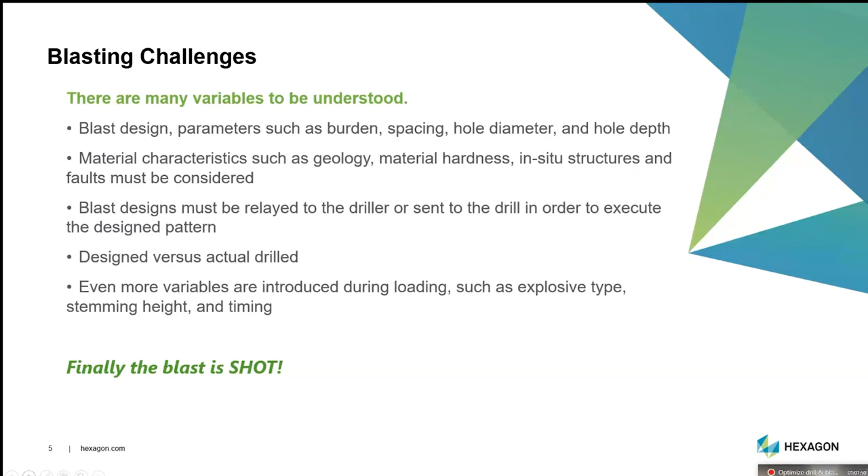Some of the challenges get introduced when you start looking at the explosives and stemming and all these things that are pertinent to a proper blast. So all these challenges, we are aware of them, and you need to have a very good understanding of this. So once you have done your blast, there is a need for you to quantify the blast or to clarify how the blast has gone, and to give an account of whether it is a good blast or a bad blast.

And in most cases, I think it's quite industry standard that we use some key performance indicators. It might be fragmentation, it might be vibration, it might be ore loss and dilution to quantify the performance of our blast. And I think what is critical is that delicate balance between some of these key indicators. It might be fragmentation and ore loss or dilution, which are the subject of our discussion today.

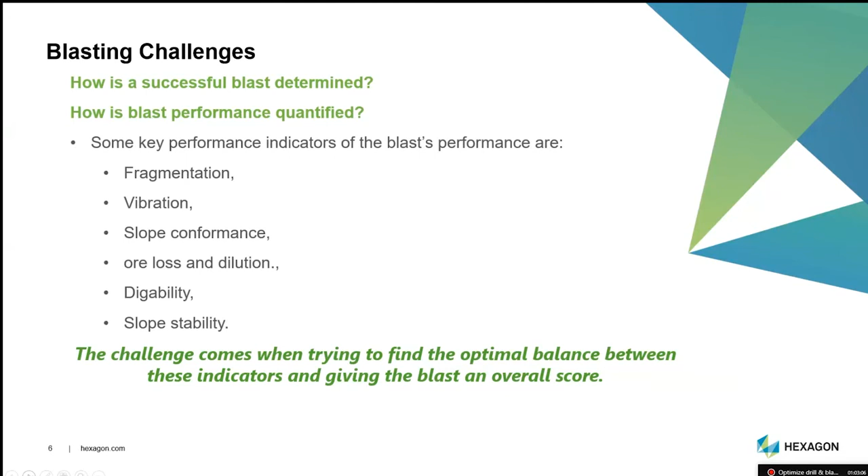But all these other factors, your vibration, slope conformance, they also play a critical role in classifying the performance of the blast. But as I've mentioned, for this session of the presentation, we're going to focus mainly on the aspect of fragmentation, ore loss, and dilution.

The benefits of improving your blast workflow are immense. I mean, if you look at the production benefits that you're going to get by consolidating your processes, if you look at the enhancement in your ore recovery and the reduction in ore dilution and the effect on the grade of mill feed, and the cost aspect: if you've got a good blast, you probably will also reduce wear on your loading equipment, the teeth on your loaders and things like that. And the big one, I think, is the reduction in the mill energy cost, which is also one of the biggest cost parameters in an operation.

Improved safety. I think safety is such a critical component of the mining industry that we cannot properly perform these processes that are so integral in the mine without taking safety into consideration. So you will see when we start talking about high precision drills and taking people out of the coal face, if I have to use that terminology, how that helps with improving safety in our operations.

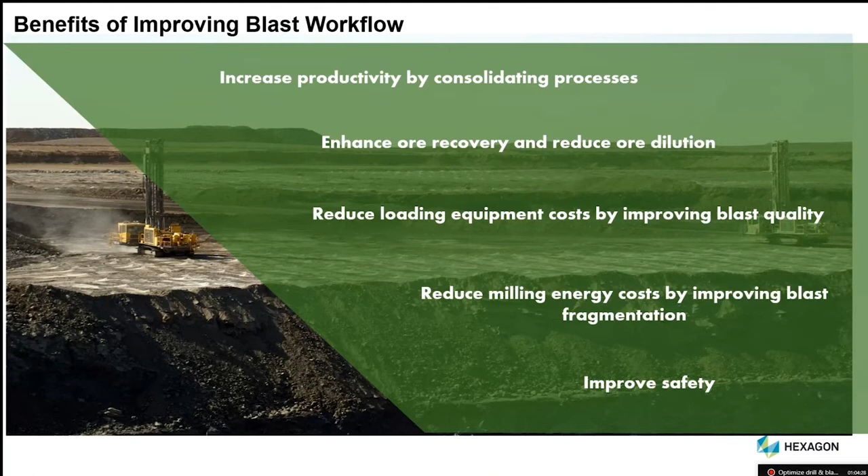I'm going to start by giving a bit of a solution overview. As Hexagon Mining, we have put together a drill and blast solution that encompasses a couple of technologies that have been in the industry for a while. And we have provided one integrated platform to solve the drill and blast challenge.

The starting point of a drill and blast is doing your design. There's a couple of packages out there for drill design. We have our own, which is called Hexagon MinePlan Blast, which helps out with the design. And then once you've done the design, you move on into the execution of the work. We have got our high precision offering, which is called OP Pro Drill, which does the execution.

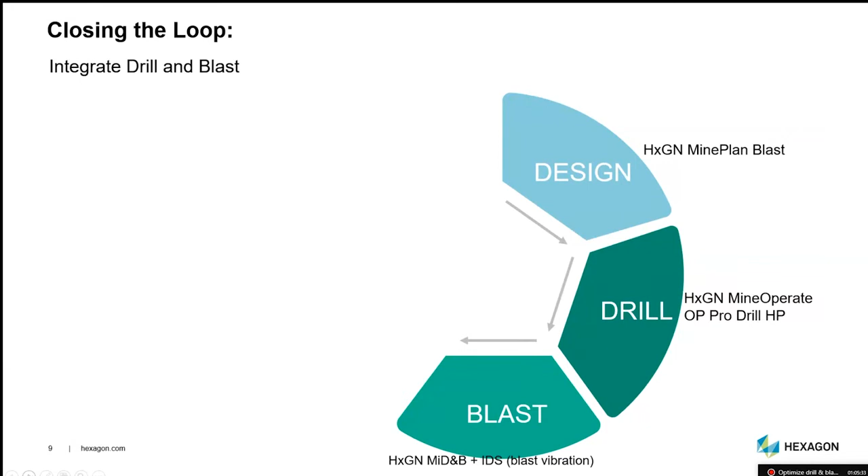We have also got a couple of tools in there that are critical for managing your blast. It might be the QA/QC process. It might be your vibration analysis using the IDS stuff. The IDS stuff is not subject of this webinar. I think we can look at that in a different platform.

What we have done, we have brought into the fold two very critical players as far as analysis and measurement of a blast or dilution, which is Split Engineering, which we acquired a year or so ago. And recently we have just acquired Blast Movement Technologies to close that loop of having the analysis and the measurement of your blast. And I think that's a very, very critical element as far as improving your blasting workflow.

You cannot improve something that you do not understand. So the measuring component is quite a critical element. And as Hexagon Mining, having brought these two companies into our fold, we hope that we provide a full-end solution that will allow you to do proper measurement of your blasting and improve on your processes.

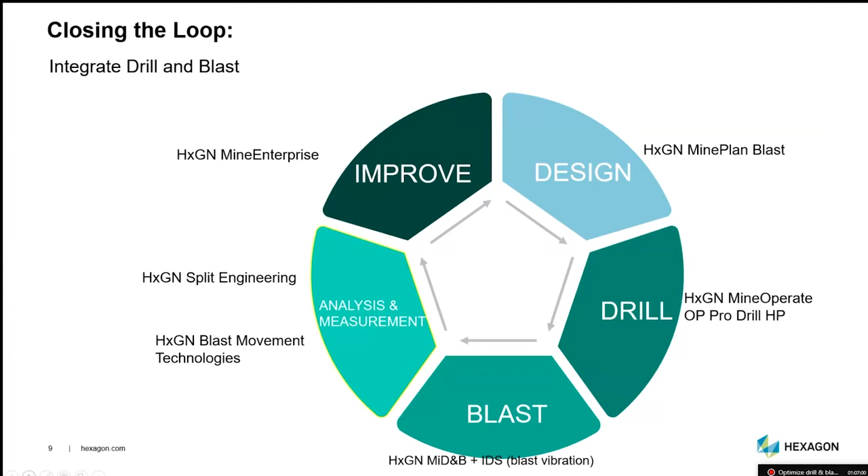And the Mine Enterprise platform is a web-based reporting platform that allows you to analyze what's happening in the field and to make changes on the go so that you improve your processes. So basically, that's the loop that we have closed as Hexagon Mining, having brought together a lot of these companies. And I'm going to share a bit of how these companies help us in solving the drill and blast problem.

Also, just starting a bit on the overflow of a typical solution that we are putting into the market. Generally, it starts with your drill and blast. You'll have your drill and blast engineer doing the patterns. In this instance, I've included the scheduling of the drill, because sometimes when we talk the drill and blast story, we underestimate the impact of properly scheduling your drill rigs, making sure that they are effectively used. I've included it a bit in the presentation, though it's not a subject of this webinar.

Once you're done with that, the ideal situation is to release or export your collar points to a high precision system, which is directly exporting this into a drill rig without having to have a surveyor going up and stake out. I know there's still a lot of operations that use surveyors to go and stake the collar position and things like that.

What we suggest in order to control that fragmentation aspect, to minimize the amount of re-drill holes and things like that, is to have the collars released directly to the drill rig, and then the operator will be guided using navigation, which can be via a GNSS augmentation platform, to the exact location of the hole, and then they will also be guided when they do the drilling, so that they reach the exact depth, that will get your actual fragmentation.

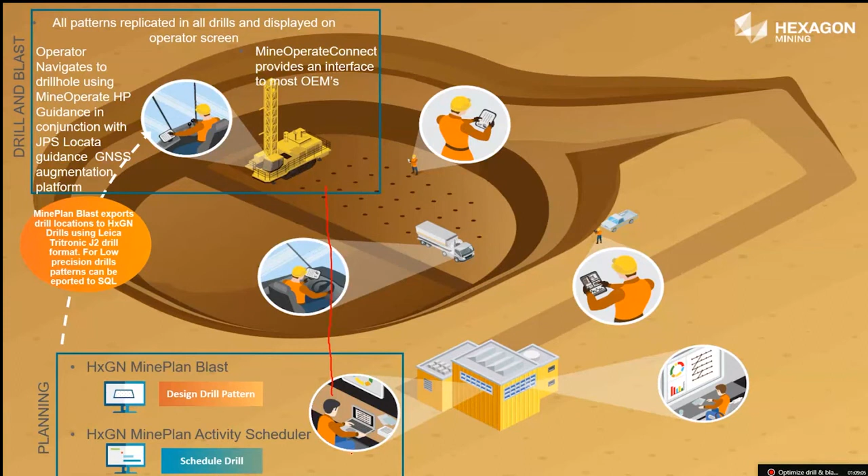What we have also done is to close the loop here: as you do your drilling, we are able to pull back this actual information into the plan, so that you can reconcile what is actually happening in the field and your design.

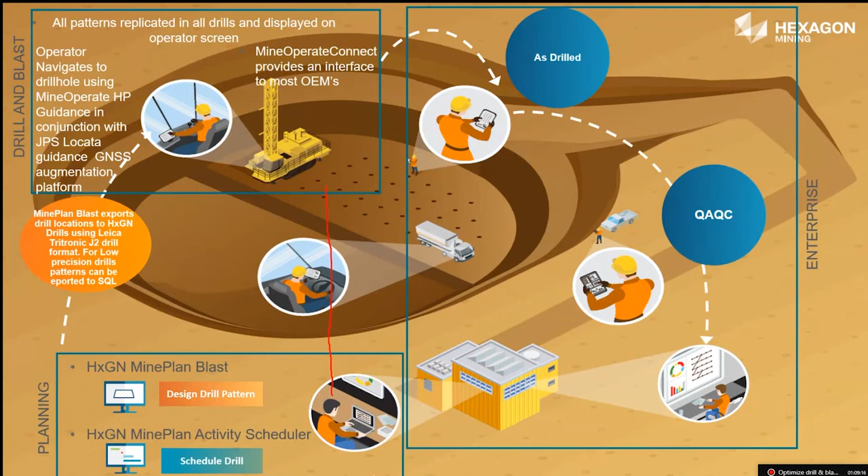That's also very critical. Another layer that we have also added is the QC option, where instead of doing a paper-based workflow where a person goes into the field with a paper and tries to check the amount of collapsed holes, closed up holes, wet holes, and all that information, you can do it now on a tablet.

And when you use the tablet, the advantage of that is that the information gets synced at the same time into a reporting platform, so that you can see exactly what is happening. So in this instance, as you do your QA/QC, collecting your information, it gets reported exactly in real time to your control room, and then you'll be able to see all that information happening.

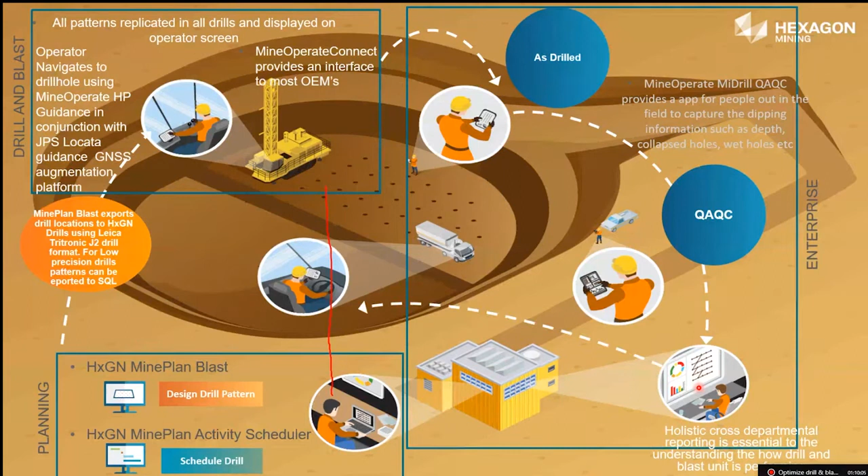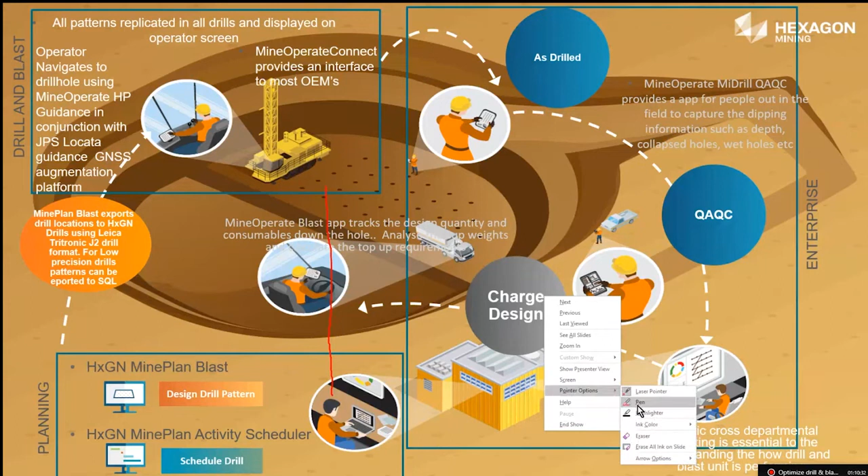What we've also done is that we are also able to link up to the explosive truck. So what generally happens is that as you do your QA/QC, you'll bring in your actual, which is that red line, bringing back the actual information, and you start doing your charging and your tying. When you do your tying and charging, you've also got now a platform that allows you to release directly to the initiators for detonation of your blast.

It can be Dyno Nobel or whoever is doing your initiation. And then once you do that, you'll do your blast. And then we have also got an app that allows you to collect the actual blasting information, and then you can also bring that information back into the planning platform, or you can just grab that information and put it into the reporting platform. So generally, that's just the workflow that we are putting in the industry.

So what we have added now is post the blast, you're going to start putting a camera on the shovel or on the trucks to analyze how the fragmentation looks, and then you can also reconcile that. And a similar thing you will do with the blast movement: you go and analyze how your blast has moved during the design. So basically, this is just high level what we intend to do with the solution.

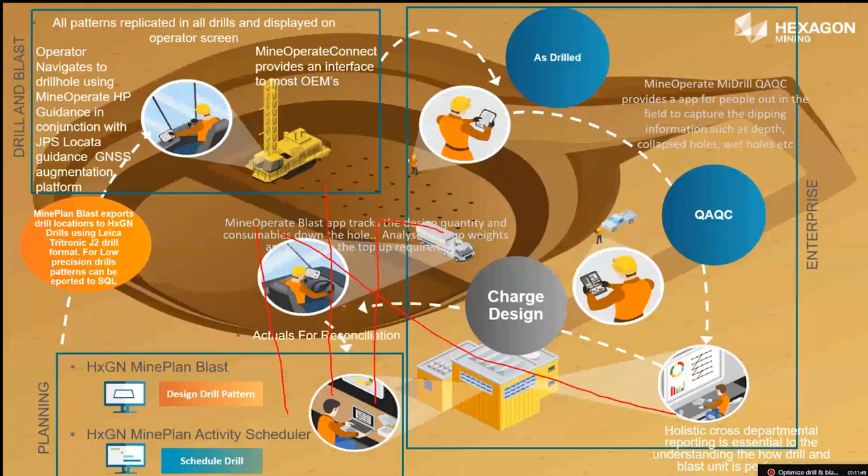Okay, now I'm going to do a technology deep dive just to explain how this looks. Basically, as a drill and blast engineer, you will start by doing your pattern design. You'll be using our tool, which is HXGN MinePlan Blast. You can factor in things like your rock properties, hardness, and all these things that you can use as parameters to do your pattern design. So that's the starting point of the process.

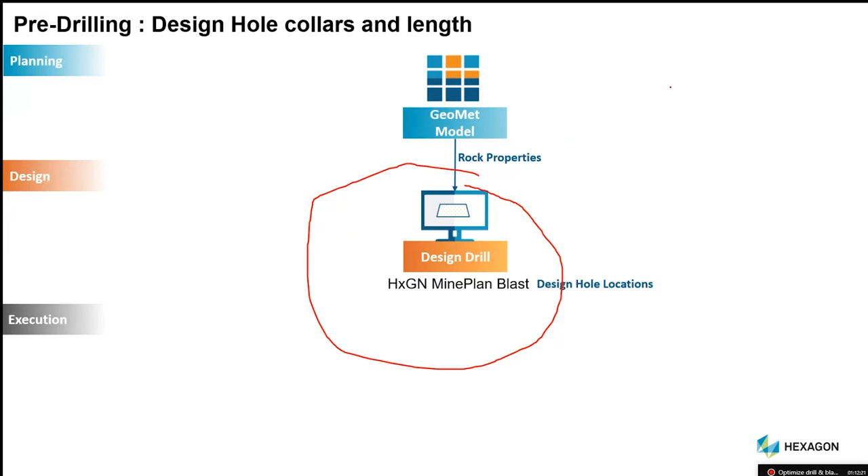And then how does MinePlan Blast do that? It's quite easy, as you can see in this little presentation in here. The tool allows you to create some templates. So you can see you've got some simple templates. You've got some inputs that you can push into the tool.

Just give me a second. I just want to make sure the video plays. I've got a little video in there. Oh, sorry. Okay, I have no idea why my video is not playing.

Okay, so basically this is the design component, the design package, which allows you to use some templates to do your design. During that process, you can also have some inputs. It can be your survey topo, it can be a block model to bring in your geological data. So these are all the inputs that you put into the design component. I had a nice video, unfortunately it's just not playing, that shows you exactly how you will do your design. So that's the first point of the process.

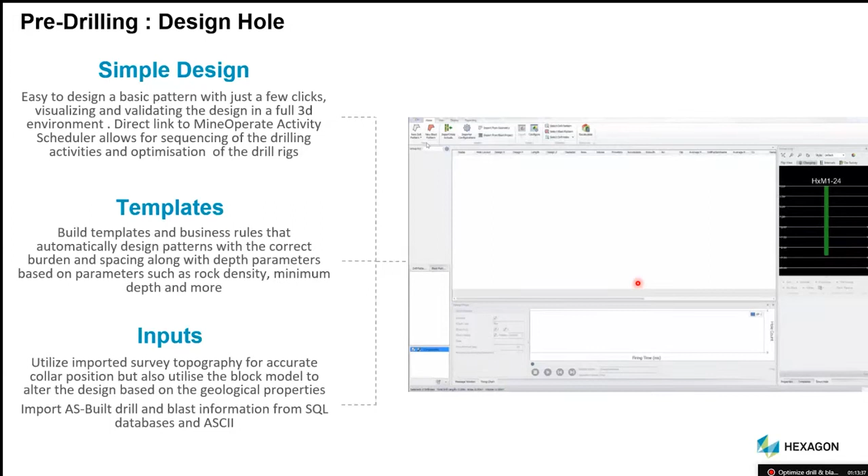Once you're done with your design, the next step is to release that design into operation. Generally, in a typical operation, you'll probably export an ASCII file and give it to the surveyor to go and stake with cones where the drill rig needs to go. What we have with the Blast allows you to do this seamlessly.

Just give me a second. I don't know why my videos are not playing. Let's just. Okay, I apologize for that. I don't know why my videos are not playing. Okay, that's much better.

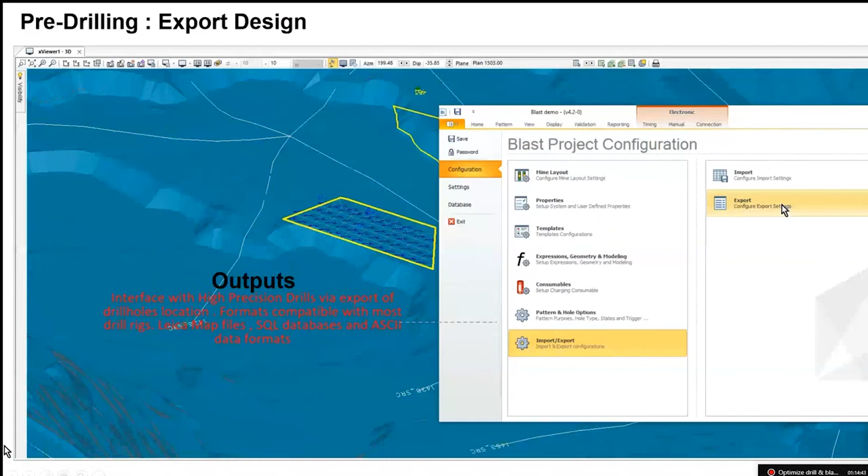So this is the export component where you'll be able to export your design directly into the drill rig. So you can see there is a Leica export that you're doing there. It's quite simple. You just need to pick the pattern and then hit the export tab, and then that is exported directly into the drill rig database, replicated into their server, and then the operators will be able to access that workflow.

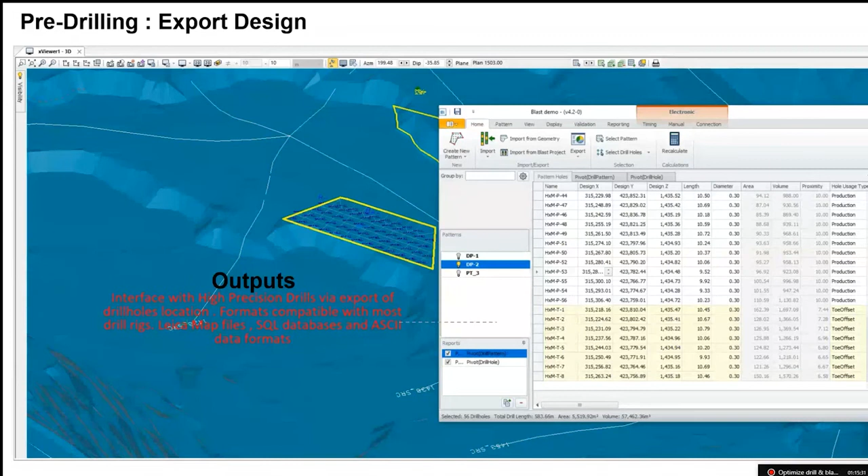So this is quite critical because you're preventing that layer of importing and exporting data. You're making much more of an integrated workflow. So now you have exported to the field. What will the operator see in the field? The next thing that will happen is, let me just go one step back.

Things are just a bit too fast for me.

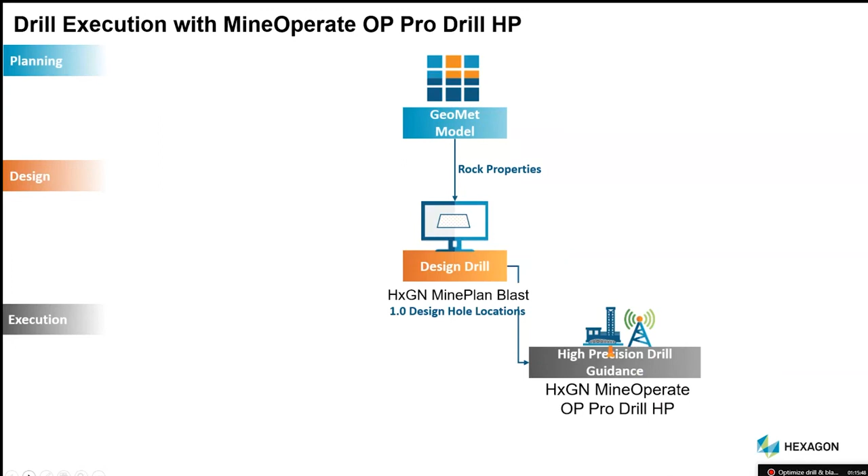So this is the exporting. You do the exportation to your drill rigs, and then this is what the operator will see. So with this, there's some hardware that we put on the drill rig, which is our discovery box and a display. So here on top, this is what an operator will see, and then this is all the hardware that we'll put into the equipment.

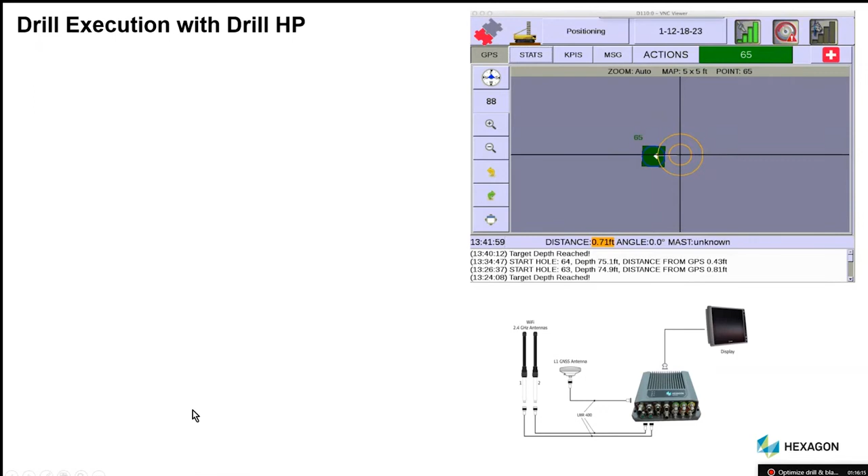Okay, I'm just gonna quickly... So this is high precision machine guidance. It is using GNSS augmentation to move the drill rig to where it needs to be. And then, as I said, it's also a direct import to the drill rig from BLAST. We are able to connect with a lot of CAD and a lot of drill rigs in the industry, so we're able to connect seamlessly to that.

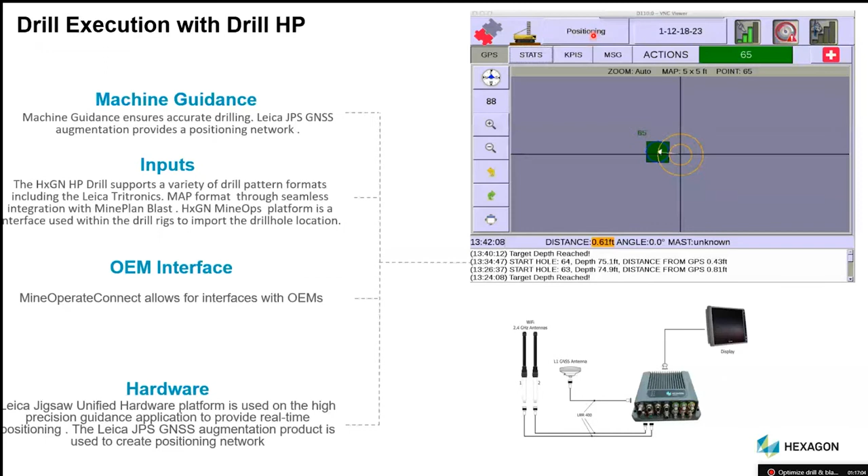So this is what an operator will see on his screen. I'm just going to play a bit of that. So on top here, you'll be able to see the position and the activity that he's doing. In this example, the operator is currently positioning himself, and then you can see the status has changed and he has moved to drilling. When he's drilling, here on your right, you'll be able to see the progress of his drilling.

This is the target that he needs to reach. There are some parameters involved in there. You can also see the penetration rate of his drilling. So the operator will see all this information and be guided to drill to that length. The biggest advantage is that you prevent over drilling into the bench below, which has devastating consequences when you drill the next blast below. So it controls the bench level, which is quite critical.

The operator doesn't have to use his judgment; he'll be controlled by the drilling. Another important factor is that it gives him parameters. Here you can see the distance, telling him exactly how far or how close he is from the design distance, or the design meters, or whatever that needs to be. So this becomes a very critical element for the drill rig.

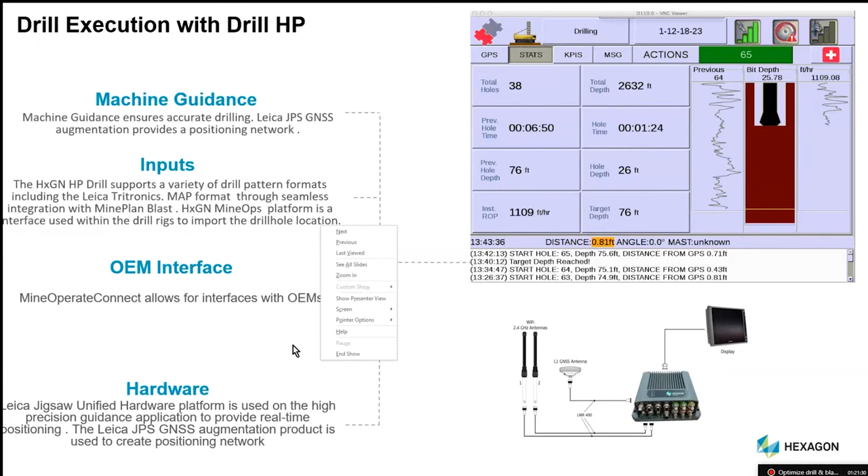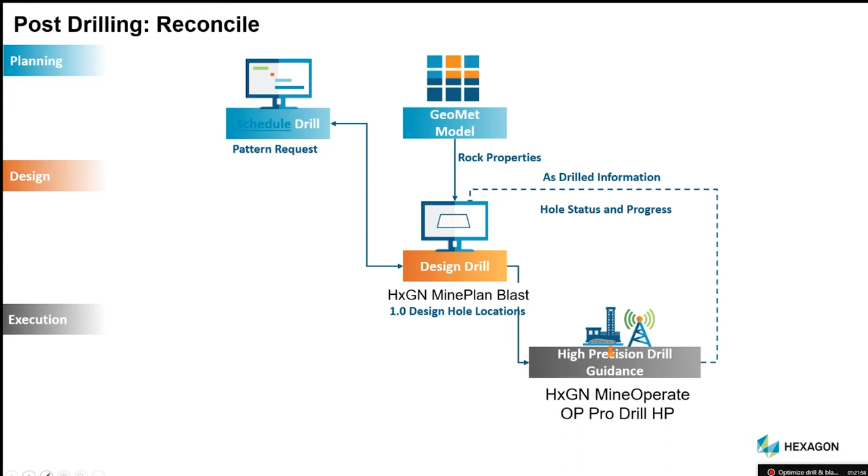So as you do that, as I was saying, you can bring back the actual information. So in this instance, you'll be collecting your as-drilled information, the actual collar position. You bring in, as I said, the hardness using the compressive strength of the rock. You can bring that back into MinePlan BLAST so that you can change your modeling and do a few things to correct, so that you get the correct fragmentation and you can reconcile.

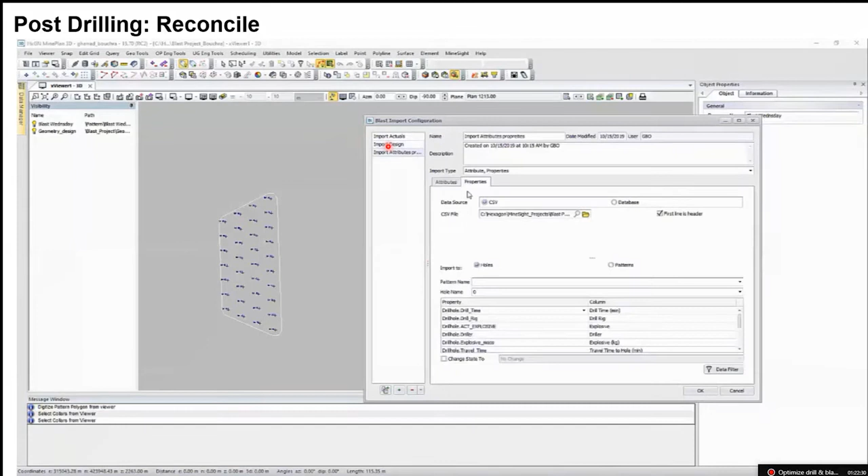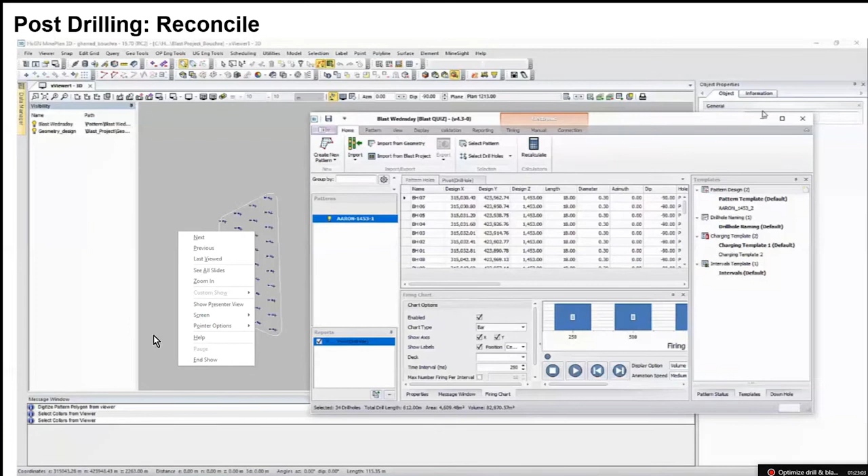So what this does for you is that you're bringing back the actual data. And when you bring in the actual data, it allows you to start to analyze, to say, this is what I've designed. This is the collar position that I need them to go and mine. This is what they've actually done in the field. And then you can start doing your reconciliation. I'm just going to let that play.

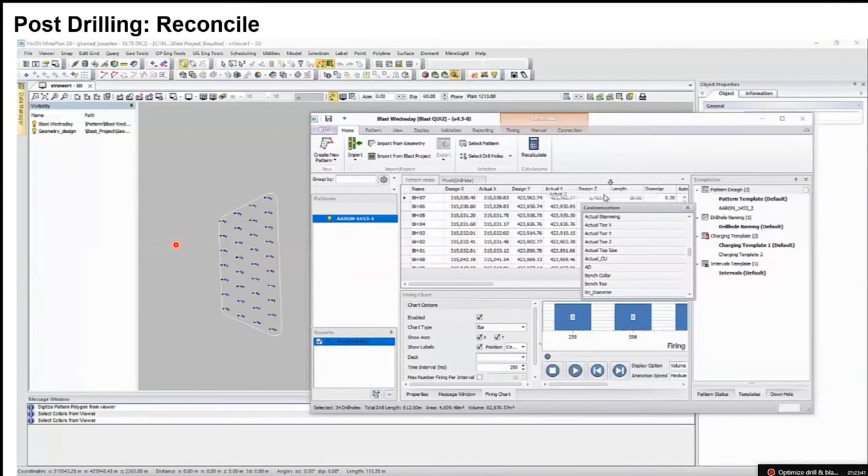So that's your actual information. And then you can see that it's overlaid with your design. So when you do this, you can start to double check to say, this is what I've designed. This is what the drilling has done. Are there any variances? Can I change my patterns? Can I do specific things so that I get my optimal fragmentation?

Another thing that you also do is when you do your drilling, you can also take the app. With the app, it allows you to go into the field, and then you can do a QA/QC. As I've said, instead of using paper, you can come in here and capture the actual information that's happening. So if it's a wet hole, you can put in a comment. If it's collapsed, there's a couple of things that you can put in there.

So the nice thing about the tablet is that if, let's say, you've got a hole that has been closed off, you want to add an infill hole, you can also just do it easily on the tablet in the field. You can just go and click a position and say, this is where I need to redrill my holes, and then it will seamlessly do that for you.

Okay. So what I've covered in here on this spreadsheet, I've covered the drill. You do your drill design. You release your design to the field for the execution of the work. As you execute the work, you'll be able to bring information, geological information of the rock you're drilling, your hardness, and things like that. That will assist you in fragmentation modeling.

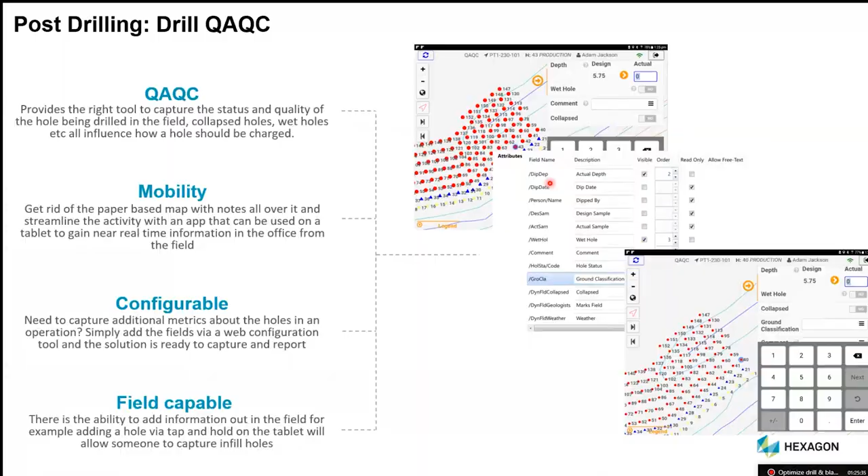Once you've done that, you bring in your actuals, and then you start doing the tying and the charging. So, as I said, there's a couple of these in the industry, but Blast allows you to use templates to start doing your charging. You start doing your tie-in. It might be using electronic detonators or manual detonators. It doesn't matter. We have got all that functionality for you to do that.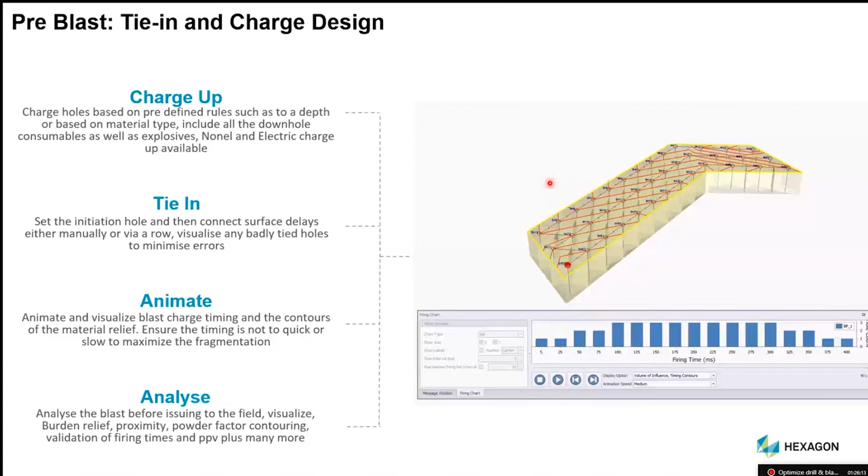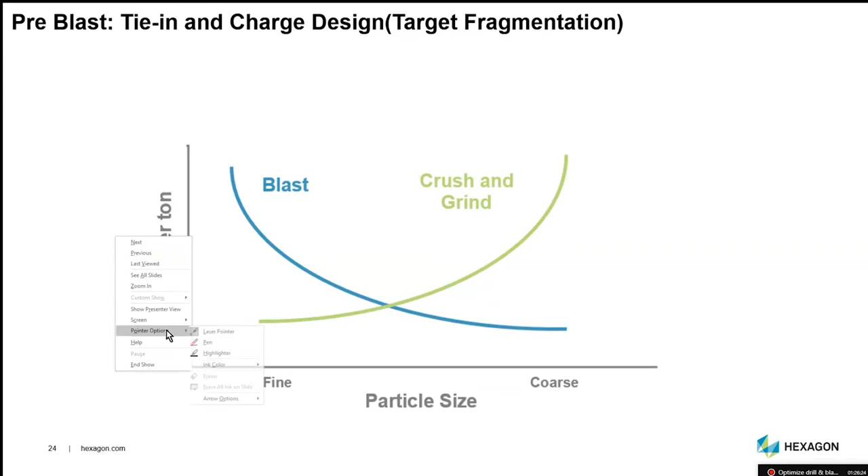But what is very important when you do your tie-in and charge design is that this is where you have got your first chance to control your fragmentation. So this is one of the most common graphs, I think, in any drill and blast engineer's office. What this graph basically shows you is the cost per ton, and then at the bottom, it shows you your fragmentation.

So if you've got your fragmentation and your cost, somewhere in there you have got your optimal fragmentation. So here at the bottom, you've got this green line. This is your explosive costs. And then the blue line here is your mining cost and your crushing cost. My pen is not working. So this is the mining, this is the crushing cost, and then this is the explosive cost.

You can see that the finer the fragmentation that you're going to have, it's got a very direct influence on the cost that you have. So the critical element is to try and get that optimal balance, to say which one is the most optimal blasting condition that I can use, so that I can balance this cost and this cost graph. We can go into details with this graph. I think there's a lot of discussions.

And why I've put this graph is that when we do your tie-in and your charge-in, we base most of the modeling on the Kuz-Ram model. The Kuz-Ram model is basically taking into effect this model. So this is very critical for you to understand, to see the impact of each of your fragmentation on each of your costs, and what is the implication of that.

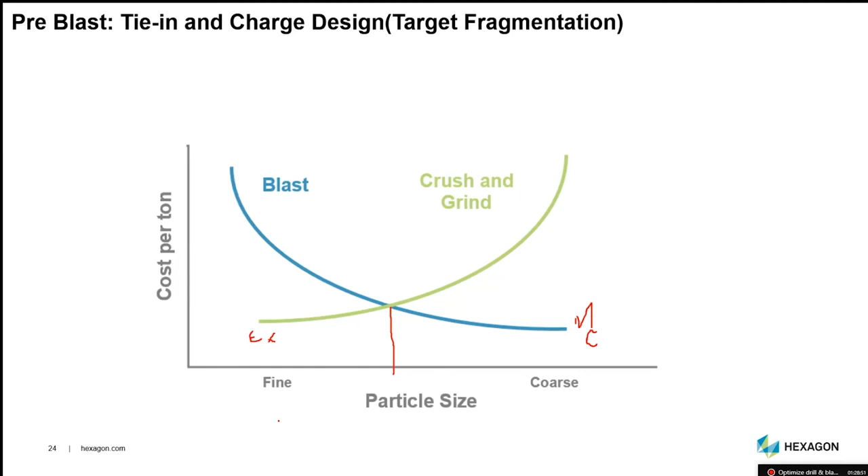That's where we now move into the design. So when you do the design, that's where, as the drill and blast engineer, you've got your actuals from the field, and then you're going to start applying the Kuz-Ram model to predict the fragmentation that you're going to achieve.

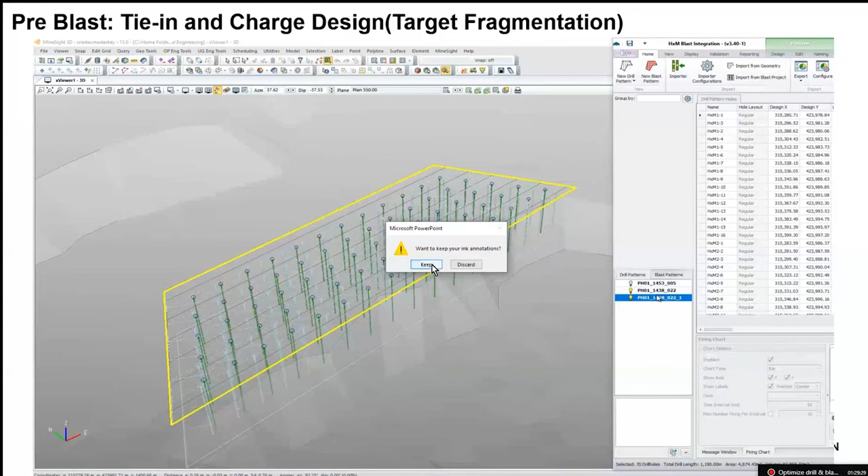See if I can make it play. I see there's a couple of questions that are coming in. I'm going to try and address some of these as I go. Okay. I've exited. Let me just restart my slideshow. Let's see if I can play.

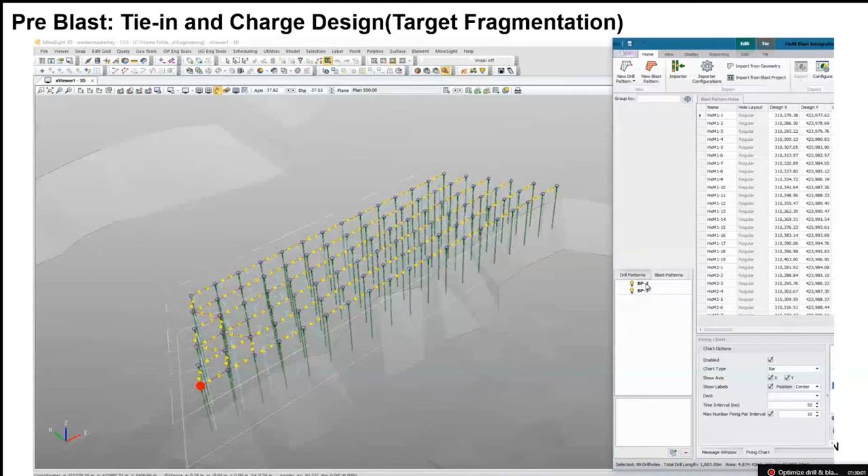So this is on the design component. You have done your tying, you have done your firing, you have put in all the blast and the explosives that you want to use. In this example, I've got two patterns, which is blast pattern 2 and blast pattern 3. I've tied them in there. I've done a simulation of how the blast is going to go off. This is just an animation, the timing, seconds and things like that.

What I can do once I'm done with that, I can open up the fragmentation model. So under the fragmentation model, as I said, it's Kuz-Ram that we're using. Unfortunately, we have not yet included the other models into the design component. So in here, what you need to specify is the undersize and the oversize. So you're going to say, this is the undersize that I need to achieve from each of the patterns. In this instance, I'm looking at pattern 3. This is my oversize that I need

to input in there. And then that becomes an input into calculating your cumulative distribution graph. So on your design, it models up your fragmentation analysis. It's going to give you your P20 or the mean weighted average that you can achieve from each of the blasts. So what's important here is that you can start playing around with parameters.

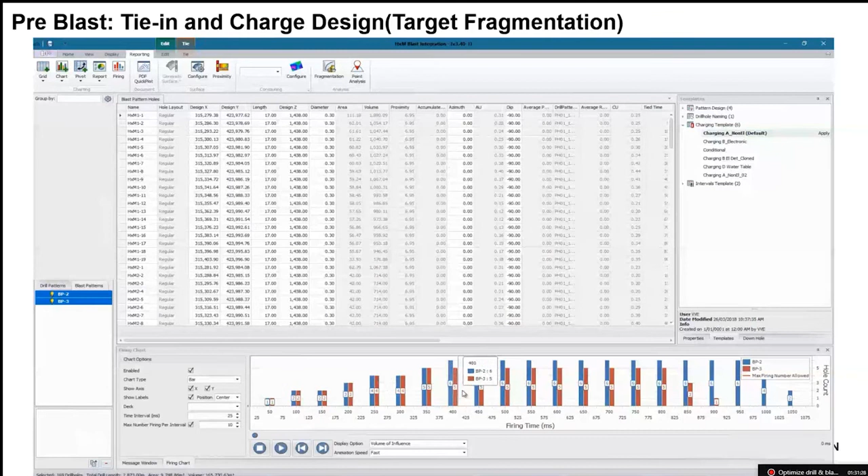Because in the Kuz-Ram model, what is very important is changing the relative weight strength of the blasting agents. I think there's a lot of work that has been done by AEL over the past years in trying to estimate that weight. So you can start playing around with different blasting agents. So you can say, I'm going to load my ANFO. If I run my ANFO, what is the profile? What is the mean average fragmentation that I'm going to achieve?

And then you can also change that, and maybe use an emulsion-based explosive so that you can see what the change is. And then that is going to give you an example. In this example, I'm just going to get my P80 that I need to achieve.

So this is on the planning side. You are planning your fragmentation analysis. You're planning the fragmentation that you need to achieve in the field. And then you can do that by playing around with your blasting agents and doing a couple of changes. You can change the patterns. You can say, if I've done this pattern, a 2x5 pattern, this is the fragmentation that I'm going to obtain. If I change my pattern design, this is the fragmentation that I'm gonna change, and then this becomes a very critical input into the whole process.

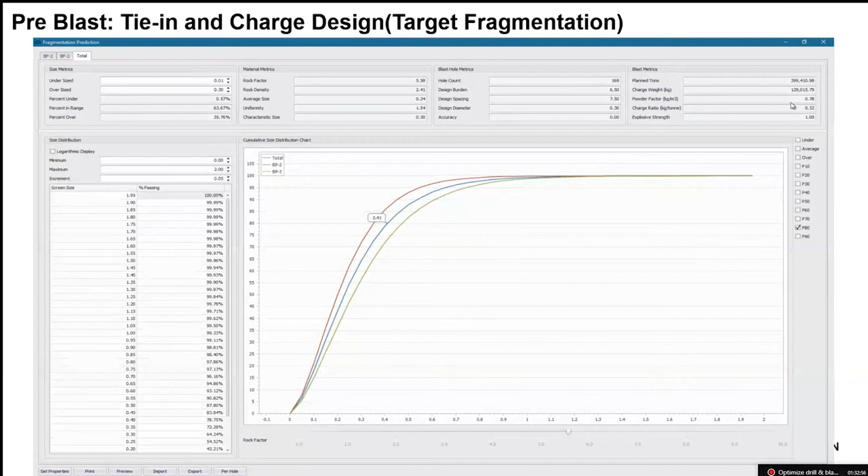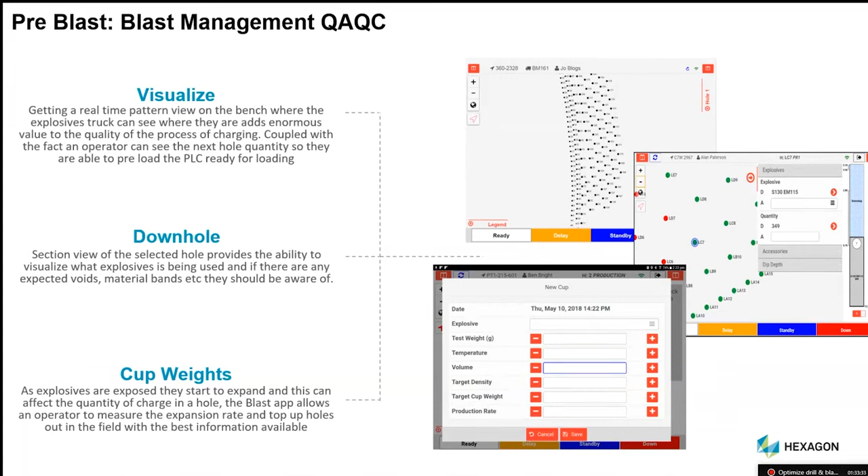Okay, once you're done with that, you're gonna go and start loading the bulk trucks. We've got an app that allows you to collect some blast information as you do. So it can be looking at the section view of all the explosives that are being loaded. You can look at the total weight. You can do a cup weight of each of the explosives. So you can do a whole lot of that blast QA/QC before you blast. And the critical information is that this information becomes available seamlessly. Okay, so that's what you've done.

In a typical profile, once you've done your blast, you will start now modeling your polygons. What we have realized is that in most instances, when you do your blast, you want to lift up that rock and crush it up. But during that process, there's a bit of movement. It can be lateral movement of the polygon, and that's where BMT comes into play in the field. So I'm just going to quickly play this BMT video. It explains exactly what BMT does for you, and then I'm going to talk through it.

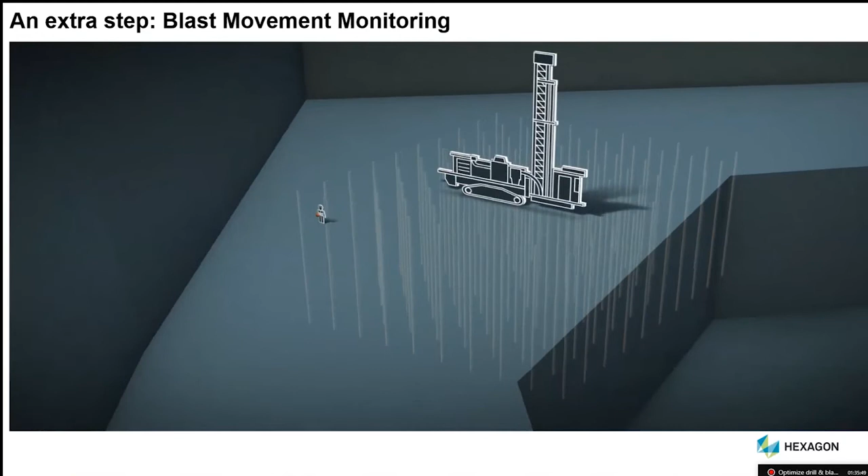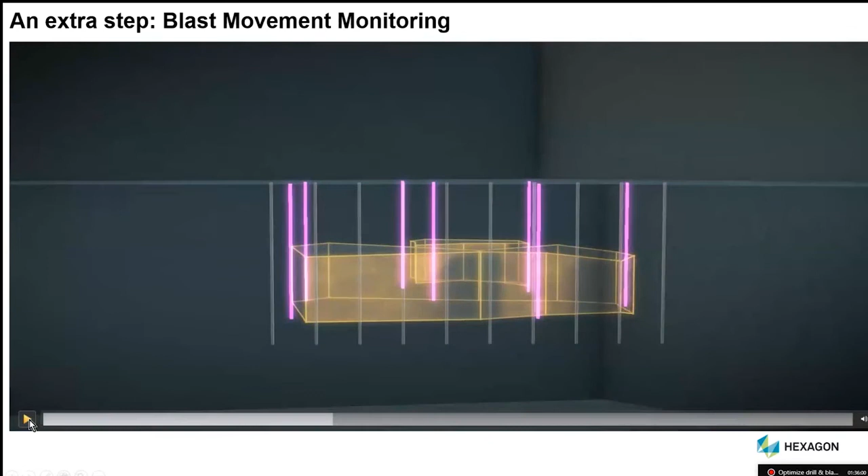Okay, it looks like the sound is not coming through. So let me just go back. I'll just talk through the solution. So basically, a BMM is a little ball that the ore control engineer will play around with. So what generally happens is that when you have done your pattern design, the ore control engineer will load into... Yes, I did hear that there is no sound. I'm gonna talk through the workflow.

So what generally happens is that the ore control engineer is gonna go and design other strategic holes using the BMM software. So these are the strategic holes that you drill in your pattern before you do your blast. So what we do, we take that little ball and we put it inside. Okay, I see there's a lot of questions in there. I'm gonna address them as we go so that I can move on with the solution.

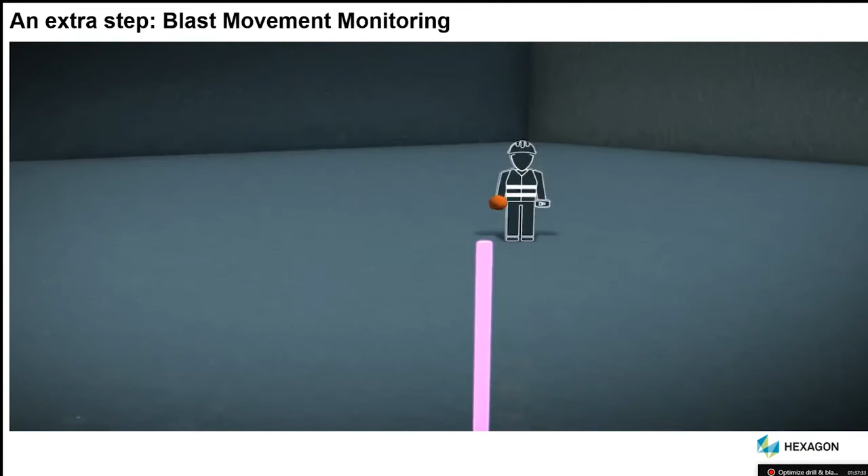So in this example, you're gonna come in here, you're gonna activate the BMM. Once you have activated your BMM, you're gonna put it into the holes. You can see he's activating his BMM. You're gonna put it in those strategically created holes. Then as you blast, the ore is gonna shift. And when it shifts, these balls are also gonna shift accordingly. After that, you're gonna bring in a post-blasting team to come and locate where those little balls are situated. So these balls are consumables. You don't retrieve them. Once they are blasted, they are gone.

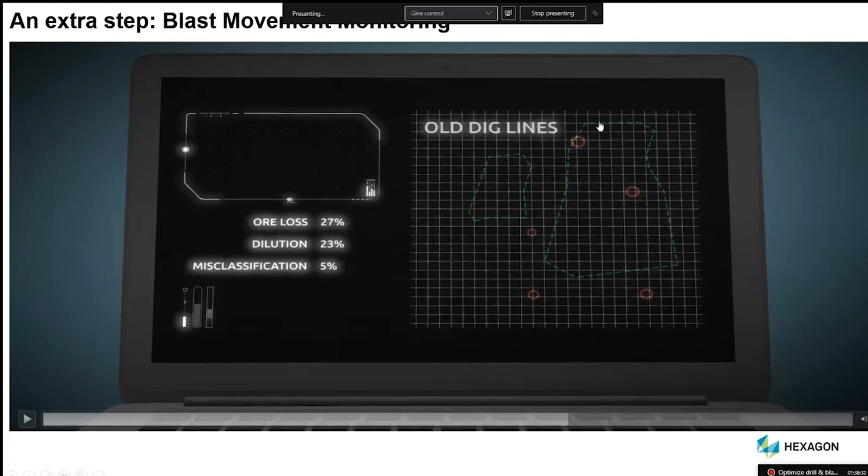But we just need to go and locate each of those balls. So once we locate that information, you can create a new post-blast polygon. So you can see here on the software, you will have the polygon in there. And then you can calculate a new polygon based on what you've collected in the field. And then this allows you to calculate your ore loss, dilution, and all those factors. Okay. So this is just the workflow that I've explained. You'll probably have these blast movement monitors.

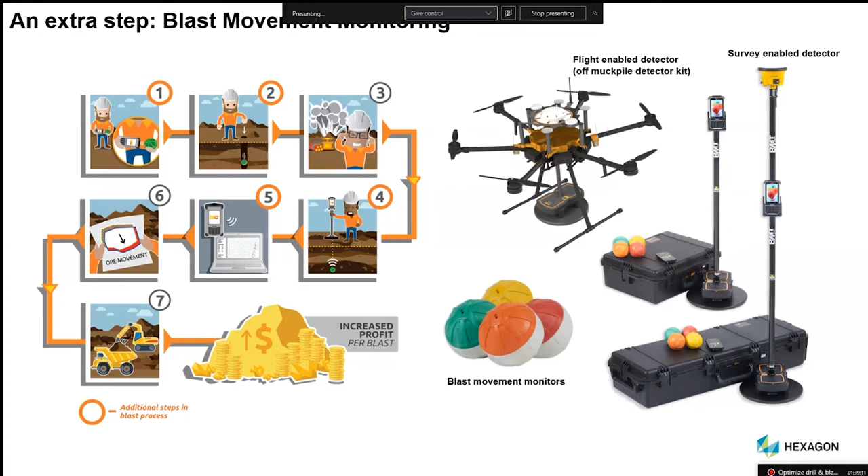You're going to put them in selected holes. And then this is all the hardware that you will need for you to go and track where each of those balls have moved to post blasting.

Okay. So the critical element now, I've spoken about three technologies. I've spoken about the blast design. I've spoken about high precision. I've spoken about blast movement. I've spoken about Split Engineering. How does all this information now add value for a client? In this example, you can see I've got my BMM software in there.

In this example, let me just activate my pointer, my pen. So in this example, this BMM software now becomes your input into your scheduling. So instead of you taking the polygons that a grade control engineer or geologist will give you, you're gonna take now the pre-blast or the post-blast polygons, and then you're gonna use that into scheduling your dig.

There's a very close relation between what BMM is doing and what the ore control engineers are doing. So the ore control engineer will give the BMM the planned polygon, and then BMM will put out what we call a post-blasting polygon that you can use to schedule.

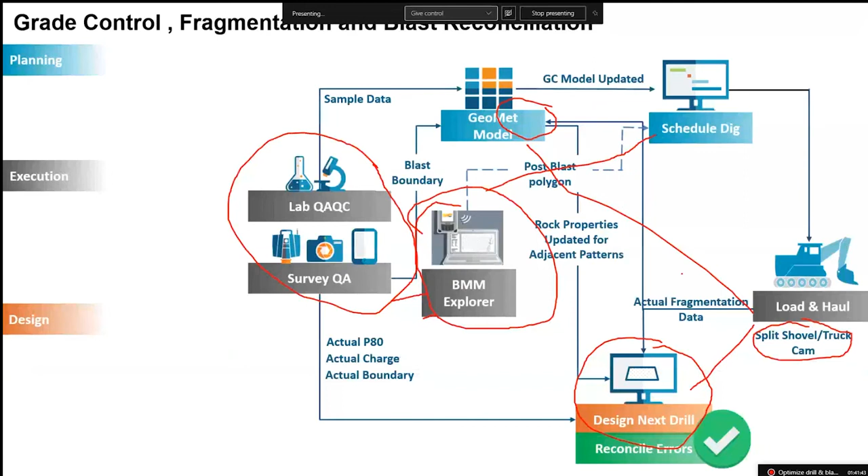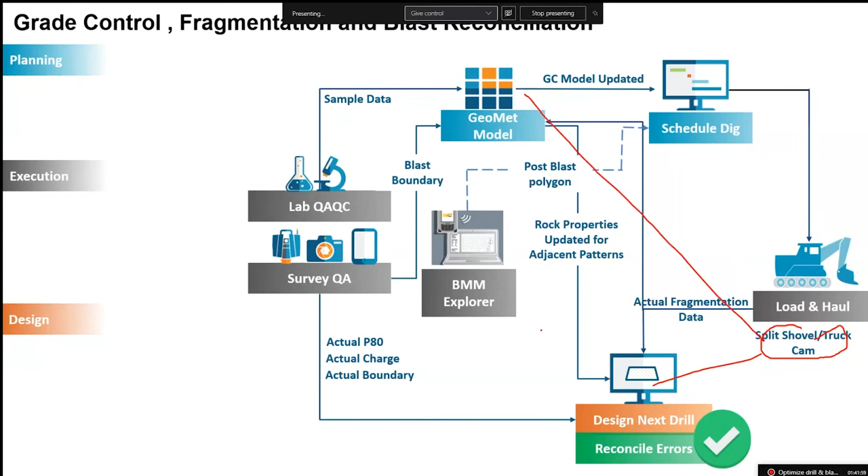A good example. This is the example that I spoke of. I'm just gonna go and speak a bit onto that. Let me just see if I can erase that. So this is the Split shovel example, where I'm gonna start bringing in my actual fragmentation back into the blast and then back into the block model. How do we do that?

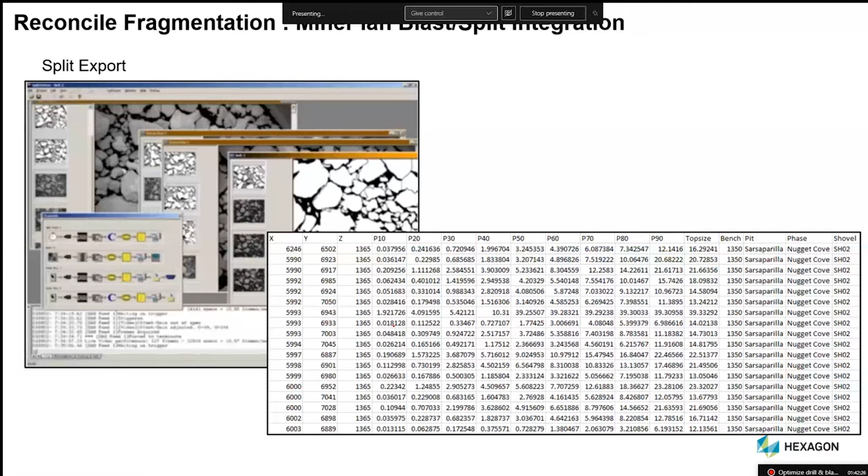As you take that information, we've got what we call Split Desktop. Split Desktop allows you to analyze the fragmentation, or the grain size, of each of these bucket loads. In there, we are able to export out some of this data. In this instance, we are not yet fully integrated. We can export out that Split data, and then you can bring it into MinePlan Blast. So now you are bringing the actual fragmentation data into MinePlan Blast.

And then remember that Blast on its own has got a Kuz-Ram model that it uses to estimate the fragmentation. So based on these two, you'll be able to say, this is what Kuz-Ram is saying based on the pattern that I've specified, based on the blasting agents I'm using. This is what I'm supposed to do. This is what happens when I go into the field. This is what Split Engineering is saying.

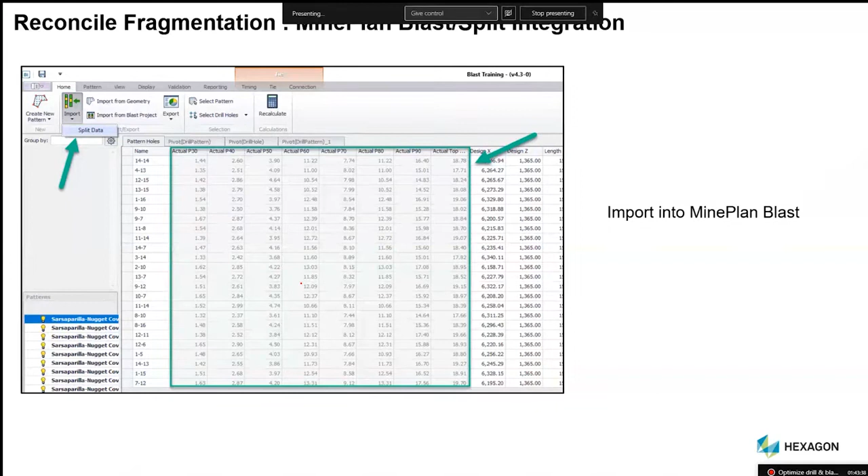And then you can reconcile the two so that you can see the effectiveness of your fragmentation design. I think the closer you have Split Engineering to Kuz-Ram or to the blast design, the better the fragmentation you will achieve in the field. So we're able to bring that information in there. This is an example of Split Engineering fragmentation data that I've imported back into Blast. So you can see all those.

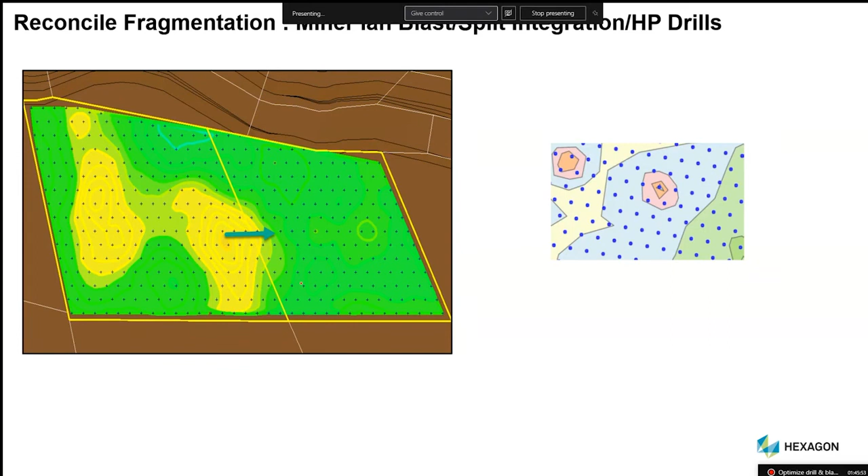This is also another thing that we generally do, is that you can also bring in the Split Engineering data. You can bring it into a drill hole management database, and then you can sort of composite, and you can build a sort of a fragmentation block model. And then from that, you can also use that fragmentation block model to analyze how you can better optimize your drill and blast solution. So this is where now we are closing up the loop. We are grabbing actual information. We are using the actual information to model and to predict fragmentation.

Okay, another reconciling factor, as I've said, is also coming from the BMM side, in which you can reconcile what the grade control engineer or geologist is specifying with what has happened post the blast. So you can open up your BMM Explorer software, and then you can load or superimpose the pre-blast polygon ore, and then you can overlay the post-blast ore. So what this allows you is that you will be able to identify areas of potential loss, areas where there's going to be a dilution post the blasting, and then you can also identify areas that have got misclassification of material.

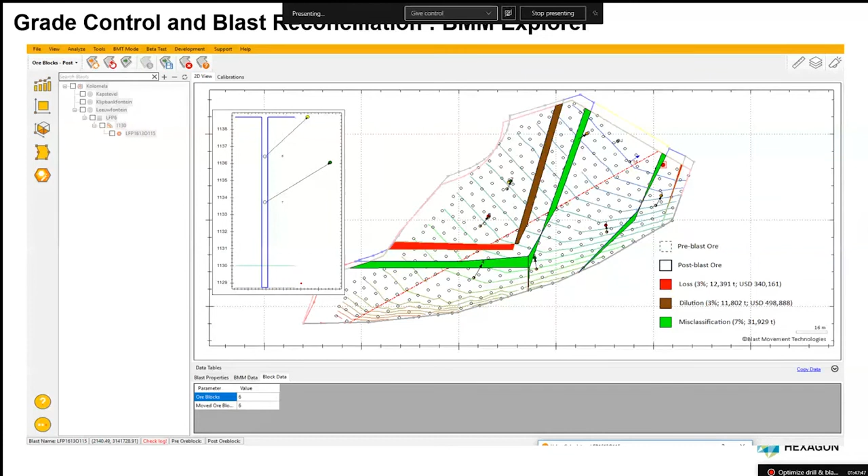So now this becomes the source of your routing or your hauling of your material. So you're going to use the post-blast ore classification now to go and load, and in that process you'll be reducing your dilution and your ore loss. So this is just one of the aspects of reconciliation that we have.

Another final piece of the jigsaw, as I'm going to be finishing off delivering the solutions, is that we also tie up all this information into an enterprise reporting platform where we can bring all this information into a tablet or into a web browser where you are able to analyze what is happening in the field. We can integrate that data. For drill and blast, that's quite easy. We can do that easily. The block model data, fleet management data, machine guidance data, we can do all that work.

I see there's a question from Emmanuel about reducing vibrations. As I said, we have a solution from IDS that helps with that. But also on the design side, Emmanuel, we are also able to kind of model a bit of the vibration. We can choose specific locations where you want to put in your monitoring devices and things like that, and then we can try and simulate a bit your post-blast vibration. But there is an actual offering from IDS that assists with the vibration analysis. But as I said, we can always get back to that at a later stage.

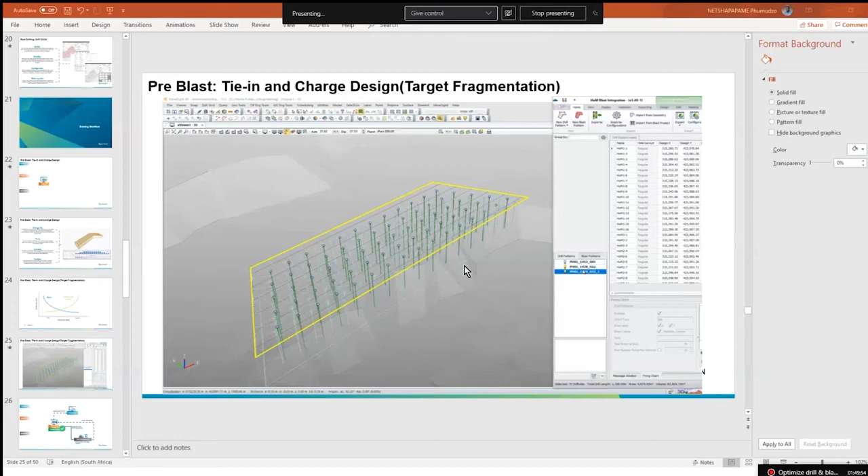Okay, let me just see if I can play this video. Apologies for that again. Just quickly go in the slideshow. Okay, it's much better.

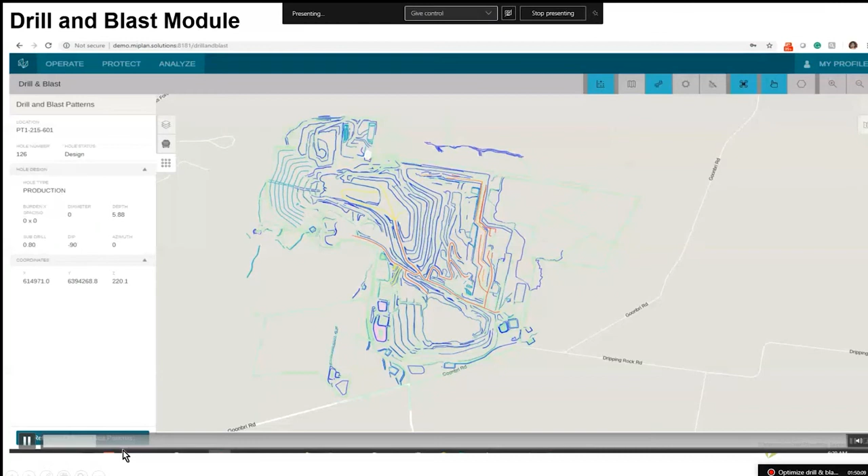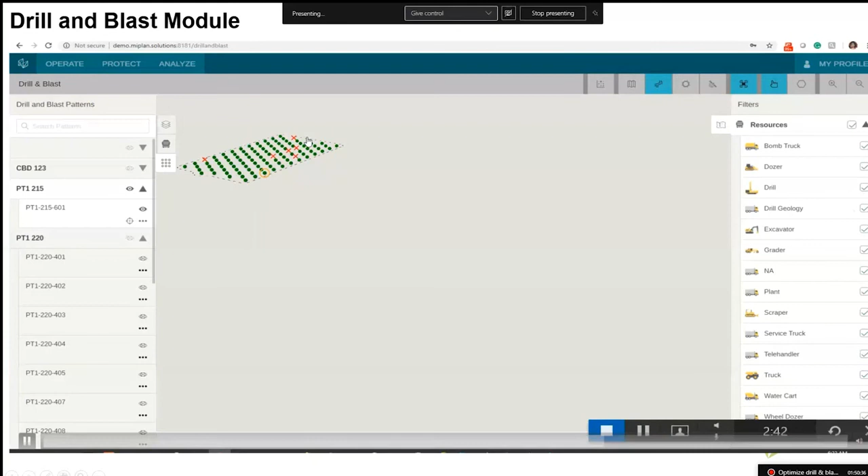So this is the enterprise reporting platform. This is the drill and blast modeling component. So you'll be able to see the location of all your drill holes in the field. This is just an example. It's also color coded, so you'll be able to see holes that have been drilled, holes that need to be re-drilled. You can also see the location of all your equipment. So this is just an example. I can see all my holes. Also, a very important factor of the tool is that it also allows you to design holes on the fly if you're in the field.

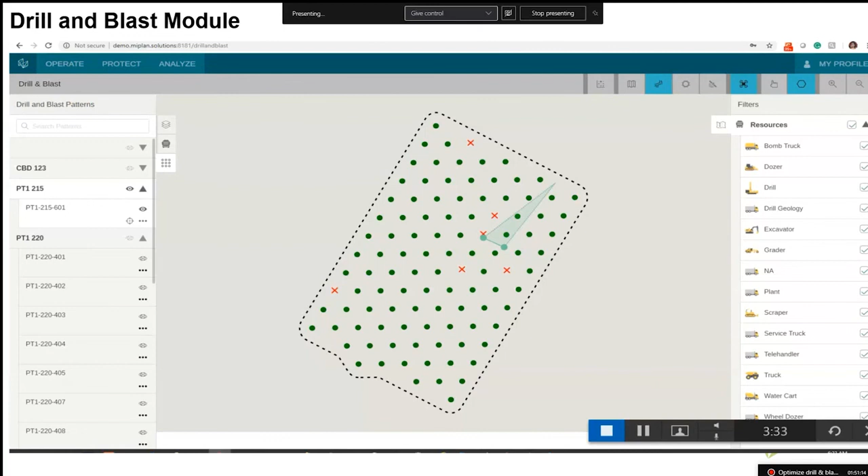So in this example, let's say you want to do a specific change in the field, so you can quickly add a hole in there. So it's very interactive. It allows you to do specific changes using an app. So in this example, I'm going to just select a few holes in there so that I can edit them. I can also just add an extra hole if I need to. So this is just some of the things that you can do with the drill and blast module.

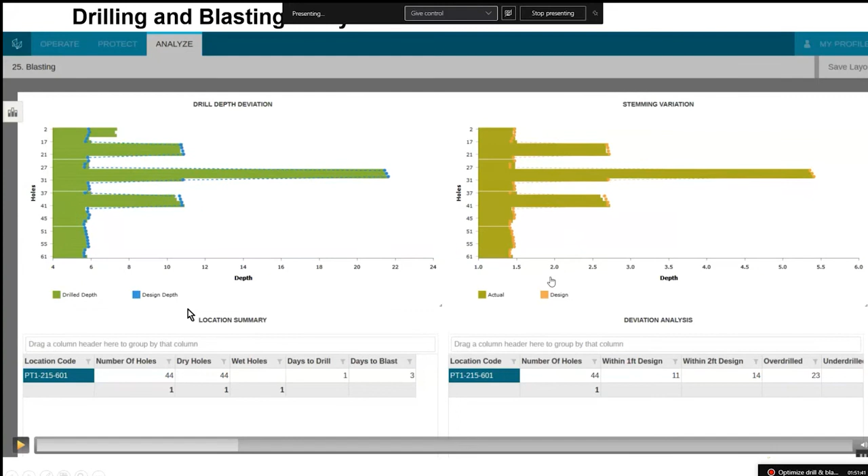Then it also has got a bit of the reporting capability that gives all these reports to stakeholders in the field. So in this example, I'm just going to look at the blasting report. So it's going to just show me a bit of drill depth variation or deviation. I can look at my stemming variation and things like that in the report using a web-based platform.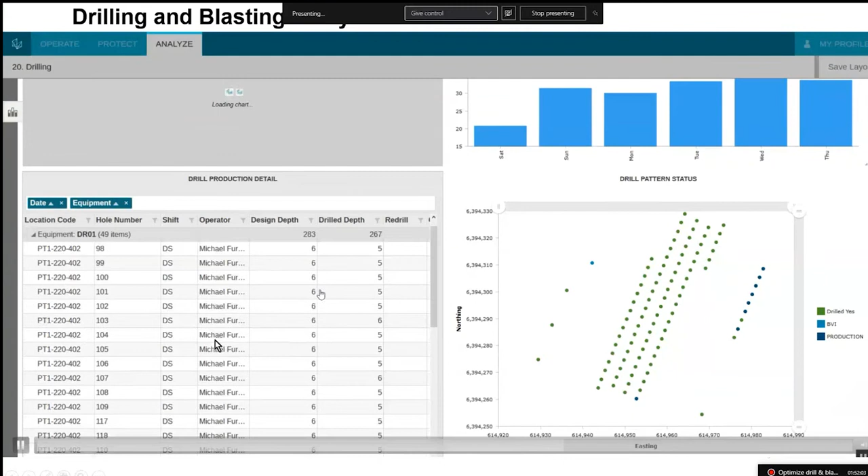I can also just open up my drilling and just check out how my drill has been performing. So in this example, I'm just going to go and choose, let's say, a specific equipment, drill rig 01. I can see who was operating that drill rig, the design depth and the drill depth. I can also just see the status of each of the holes. So this is what the enterprise level reporting allows you to do.

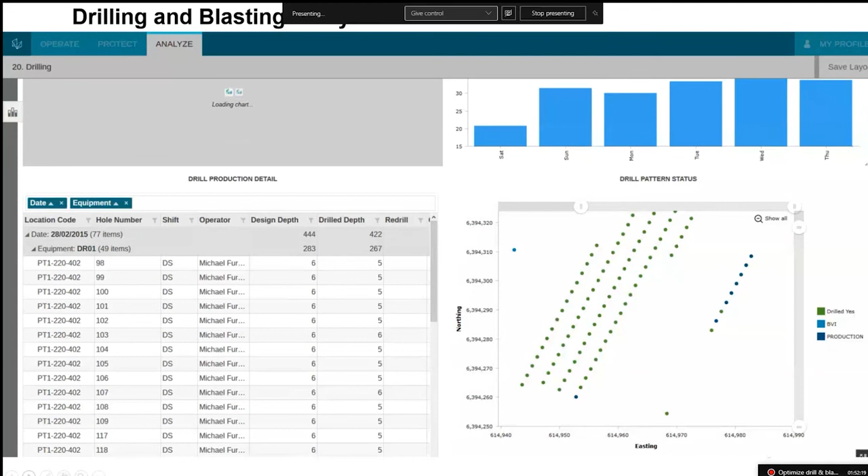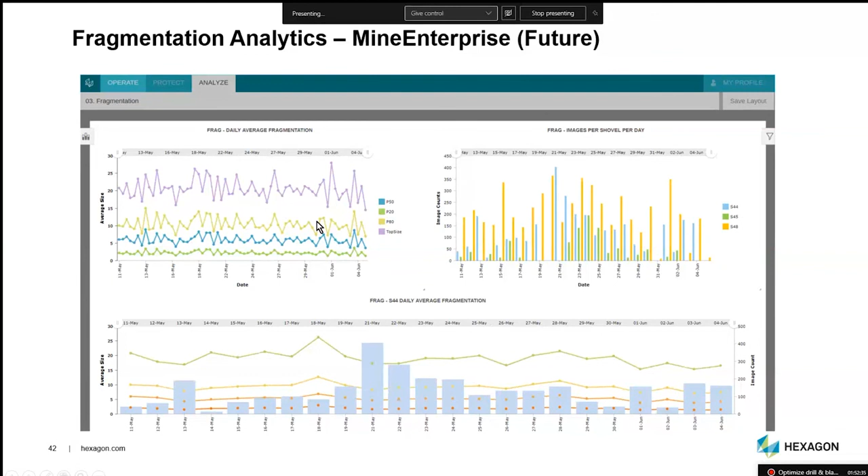It allows you to see this information in near real time, so that you can make the changes as you go. As I said, we're working on also bringing in some of the fragmentation data into the platform, so you'll be able to see your average fragmentation per day, per block, so that you can also take specific decisions in the future.

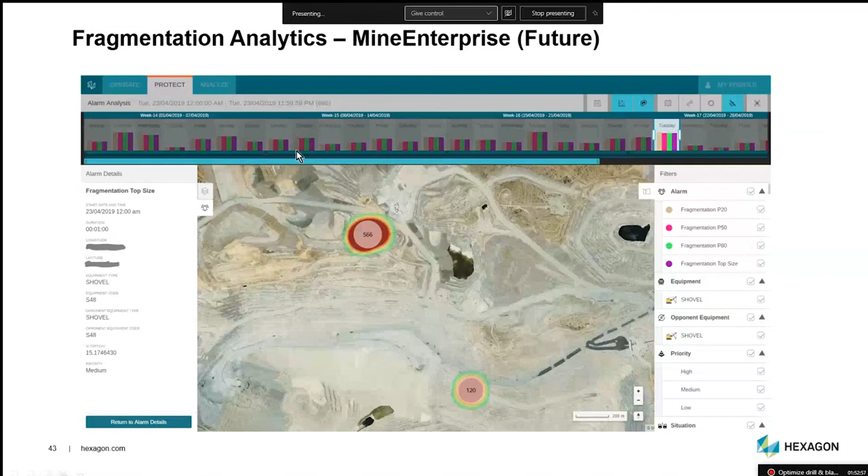We have also got heat maps, so it will just create a fragmentation heat map in the pit, so that you're able to see polygons or areas where you were not able to achieve an optimal fragmentation. This also allows you to modify and do changes into your design.

Okay, from my side, I've done what I wanted to show. The next step is just to go through a bit of the case studies. I think we still have got a few minutes to do that. Any questions on what I've shown before we go into the case studies? Are there any questions that you feel that we need to address? Pumuzo, we can go through some of the questions that were posted. Yeah, I'm just going through some of them so that I can see.

Okay, from Gilberto, he asked if there's any other fragmentation model. As I said, unfortunately on the design component, we have not yet included some of the models. It's probably something that we'll look at in the future. And then Deepashu said Kuz-Ram is widely popular, so that's fine. For fragmentation, I've answered that.

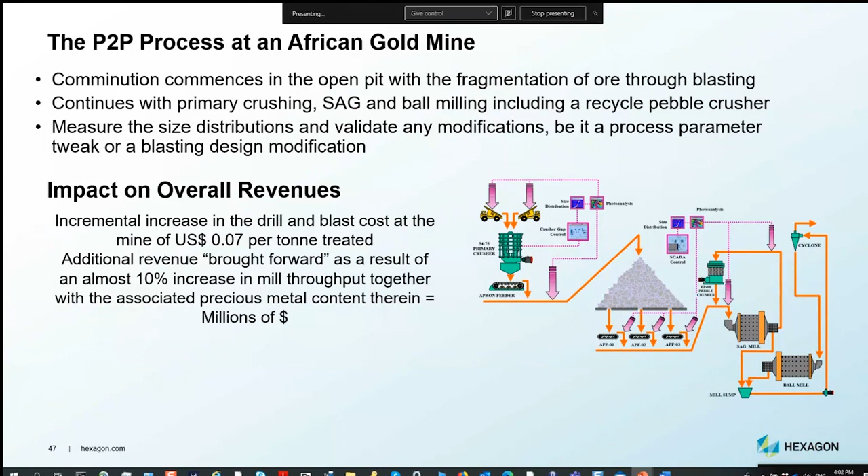I'm going to ask Zigbodi, if you're around, can you just share the value proposition that was done at the KCGM gold mine? If you can unmute yourself, Zigbodi.

Okay. So this is a case study from KCGM. Basically, KCGM is Kalgoorlie Consolidated Gold Mines in Australia. Actually, they started a trial in 2006, but when they started, they were not using the BMM for all the blasts, and they got to a time they were modeling the blast with the little data they'd collected. So we advised them that that will not help, and their reconciliation had been bad from 2007 to 2008.

So they contacted BMT for blast movement monitoring to improve mine reconciliation. It was identified as a project in the business plan for the geology team. That was in 2008. So we did a trial. This time around, we did an extended trial from December 2008 up to around June 2009. That was about a 6-month trial. So the system was implemented, and then they started using it.

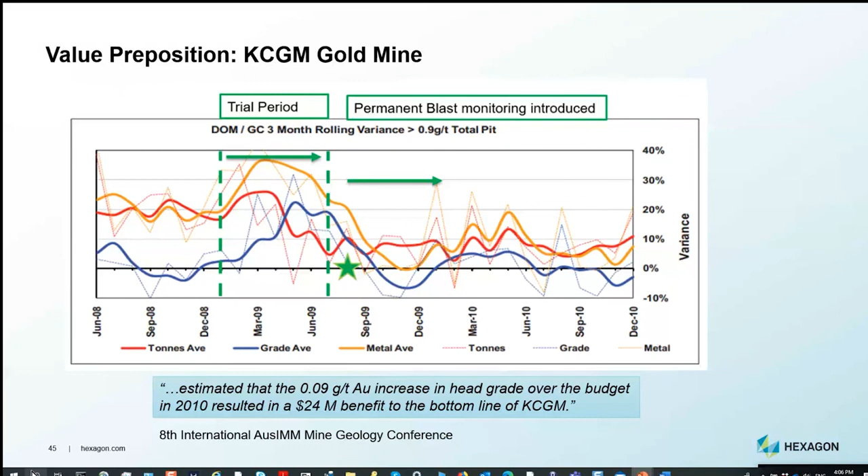So the implementation was done around July, and from that time up to 2010, we could see there's a lot of improvement in the reconciliation. And this is another value proposition from Red Dog. That's a zinc mine. They also implemented the system, and then they published this. That was in 2018.

They said that the blast movement has improved their system, and they estimated around 6.5 million annually. That's the amount they are making. Meanwhile, they spend only 160,000 USD on the system for an entire year.

Yeah, and then this is a quote from one of the geologists: the information we get from the blast movement sensors allows us to track the movement of ore in greater detail than ever before, leading to improved productivity and sustainability at our operation.

That's what is said by Brian Hall. Actually, this was published, so we are free to mention their names. It was published in 2018. So these are some of the success stories.

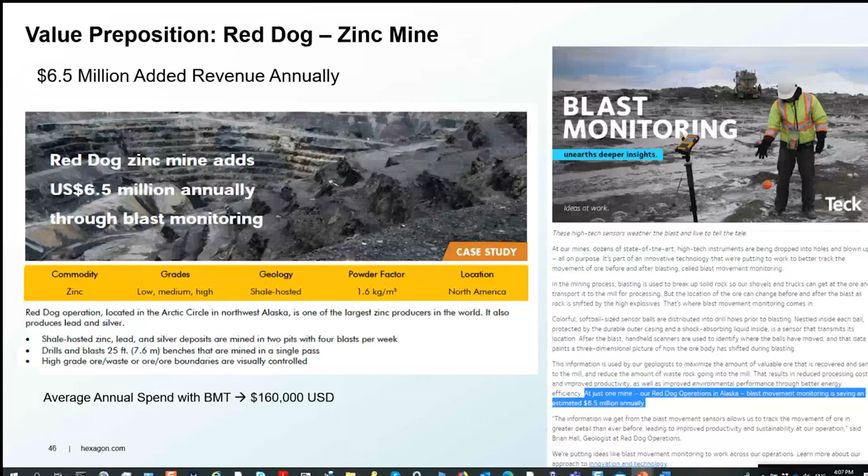Thank you. Just to close off, this is another good case from Mesquite Mine. I think it's somewhere in North America. I think when we did this project, it was still owned by New Gold. I think they've subsequently sold the mine in 2018.

I'm not quite sure of the current state of affairs there, but it was quite a good project where they wanted to improve their linear deviation of drill hole collar locations. And what they did, they acquired not only the drill rigs or the high precision drill equipment.

The backbone of their system was our blast solution, which is HxGN MinePlan Blast, which was being used to do the blast designs and release that for execution. So the process started, I think it was in May 2015, where they bought some of our high precision equipment, as I've shown you the hardware that you need to put in.

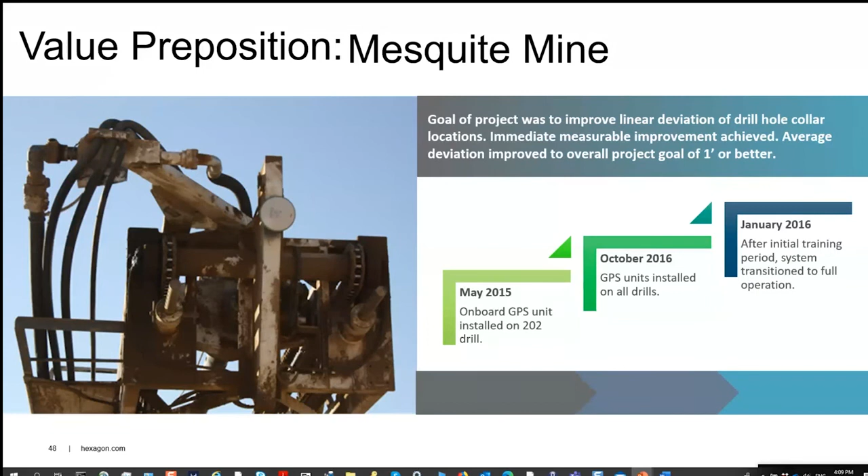In October 2016, I think that's when we started to install some of the work. In January around 2017, that's when we started to transition the system into full production.

But what was amazing is that, since the case study is quite long, I don't have time to go into the details of each of the aspects. But what they did, they used our drill and blast for designing, released that into high precision.

They analyzed, before they started the project, the hole deviation that they were getting without our solution. We ran a trial from 2015 to 2016, and then we analyzed the results to say, now if you start using HxGN MinePlan Blast and high precision, what are the kind of results that you can get?

So they could do the design, bring back the actual, as I've shown in my description of the solution. And there were huge improvements in alignment or in deviation that they were trying to track. And this is just a high level number of how they judged the success of the project.

They said in 2015, prior to installing Blast and high precision, this is the amount of tons that they blasted, and these are the amount of holes that they were drilling. So you can see there were probably a lot of re-drills, a lot of issues because of the deviation issues they were encountering.

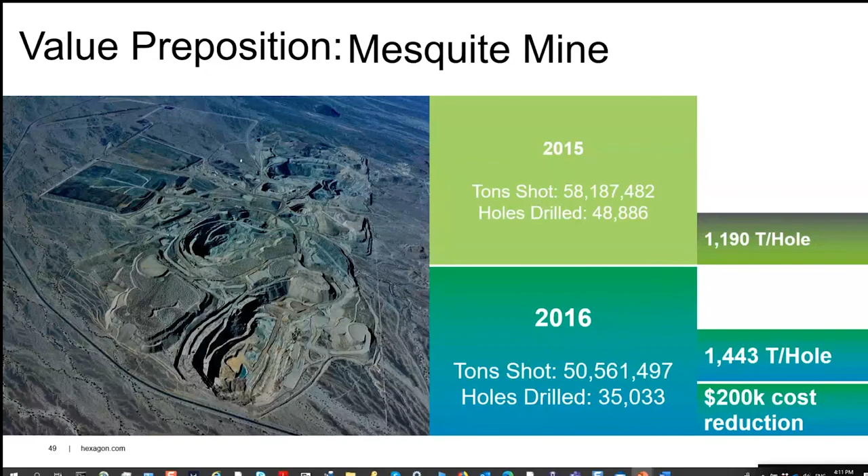If you do need a bit of this case study, as I said, I cannot go into the step-by-step process of what we did for them and how we solved the challenge. I just thought maybe I can show this cost saving that they achieved within a year by adopting our solution. Okay, in a nutshell, I think that's what we had to share with you guys.

We have gone overboard by about 11 minutes. I think it is just the breadth of the solutions that we have been covering. And maybe just in closing, what we have shared with you, these are solutions that we're working on as point solutions.

But there are mines that have got all these platforms, that have got our MinePlan drilling, MinePlan design component, high precision, fragmentation, and BMT in them. And we are going to be tirelessly working to integrate this into one value proposition so that you can gain what the mine that Edgar mentioned gained.

You can gain what BMT did for KCGM, and you can also gain what Mesquite managed to gain, in one go in an integrated platform. I think that's the biggest value proposition that I want to leave with you today.